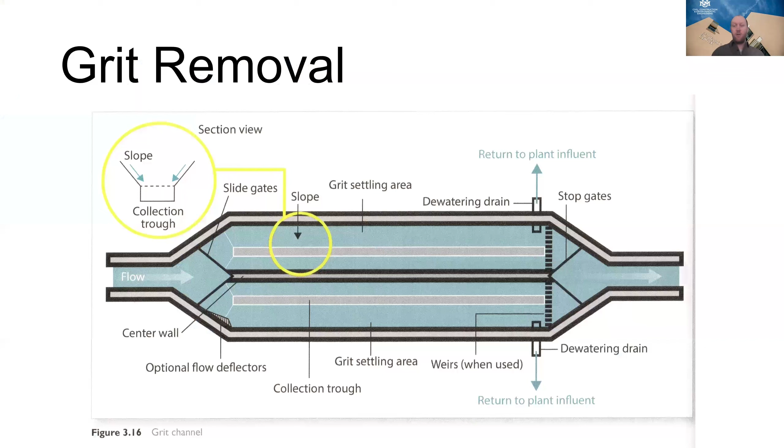Just to talk a little bit about preliminary treatment, really quick, because this also has to do with solids - but different, because today we're going to talk about biological solids. The screening process and grit removal process mostly deal with inorganic stuff, things like bags, rags, gravel, and sand. That's all removed through coarse screenings, fine screenings, grit removal, settling, and mechanical means like the cyclone separator or grit washing device. Those settle out in preliminary treatment and are disposed of in either a landfill or incinerated. These are mostly inorganic materials - rags, plastic bags, all kinds of junk.

I'm sure you've seen it all if you work at a wastewater plant. So that's not what we're talking about today - that's what we covered in a previous session. Today we're going to talk about these biosolids. This is the organic matter, so biosolids - solids that are coming in and are going to turn into our sludge.

So we have a few different streams of solids, of these biosolids, going into our solids handling process. We have our primary sludge from that primary treatment, those clarifiers, coming in here, as well as our waste activated sludge. So we have two different streams of biosolids coming into our solids handling process.

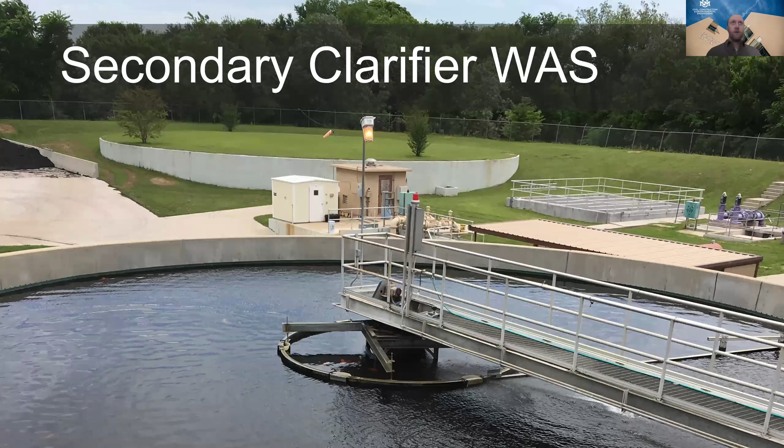Then we also have our secondary clarifier, the waste activated sludge coming from here. This is not going to have as high total suspended solids, so we're not going to get quite as much sludge coming from here. Some of the sludge that comes out of the secondary clarifier, the secondary treatment, is also recycled - that return activated sludge we talked about during our last session. So that's where this sludge is coming from that we're going to talk about today.

Then we have this thickening process, which can happen through a number of means. Then we have our digestion phase, which Matt's going to talk about later. And then we have the dewatering phase. Throughout this process, things are broken down more and the water is removed from these solids. The idea is we want to remove as much water as we can in the thickening and dewatering process, because that means less mass and volume we then need to dispose of.

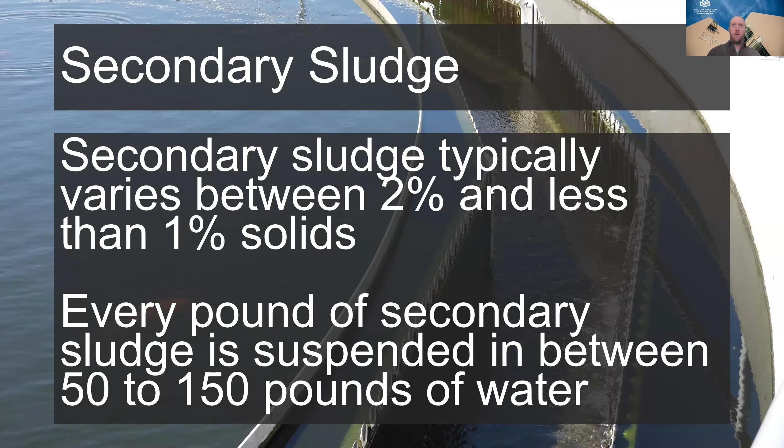If we think about the next step that Matt's going to talk about, if that amount of volume with the decreased thickness was going into our digestion step, it would mean we would need a lot bigger equipment for the digester. So if it's less dense, we need a lot bigger equipment. Through thickening, we can actually improve our digester performance because there's a lot more solids versus water. It means lower construction costs because we don't have as much volume going into that digester, so it's going to be a lot cheaper to have those facilities. And if you happen to have a digester that's heated, you're going to have to use a lot more energy to heat it up than if there's a decreased volume in there.

So for that concept, we're going to go through it, but we're going to look at the numbers associated with that. Here's an example, and we're going to do some math together. Don't feel like you need to do this math on your own. It's just going to go through so we can look at the numbers of how this plays out.

In this example, I'm going to read this off. If a primary clarifier produces 3,000 gallons of sludge per day with a solids concentration of 3%, what is the weight of the solids produced per day?

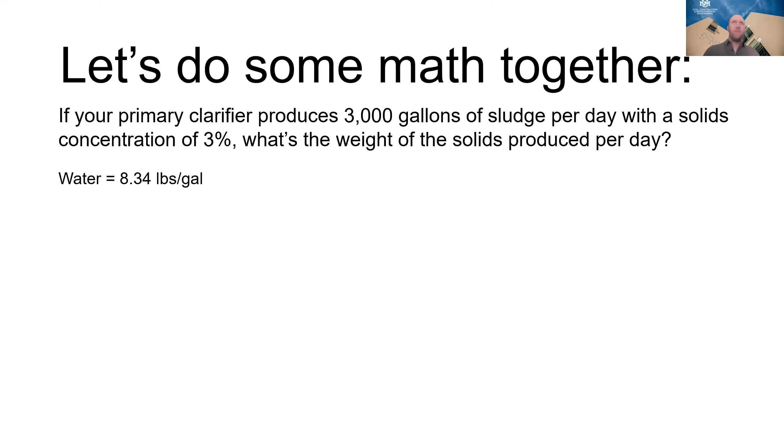If we go through this, we can find a formula for this. I don't know if this is on that formula sheet that you get with the exam or not, but this is the formula you would use to figure out the weight of that dried sludge.

If we use this equation and plug our numbers in, we have 3,000 gallons per day of sludge. And then this 8.34, this is the weight of water. So for every gallon of water, it weighs 8.34 pounds. And then we have our 3% sludge. So 3% of the volume of that is going to be the actual solids.

That 8.34 is the weight of pure water. Of course, sludge is going to be slightly more than that because there is sludge in there, but it's going to be close enough for our calculations. If you wanted to know the actual weight of your sludge, you could take a gallon of it and put it on a scale, or you could figure out the specific gravity of it and have a ratio compared to water. But we're going to use 8.34 for that.

If we cross out our units and calculate that out with a calculator, that 3,000 gallons of sludge per day is going to turn into 750 pounds per day of solid sludge. So that's what we have to get rid of. We can think of it this way: of our raw wastewater coming in per day, there's 750 pounds of solids that we need to remove and dispose of.

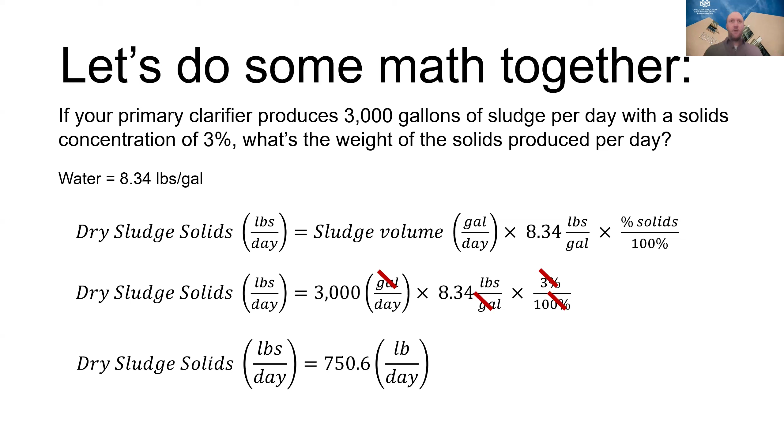Say we are able to increase the percentage concentration of our solids, or of that sludge, to 5%. Say we do that through a gravity thickener or something like that. So as opposed to 3% solids, now we're up to 5%. Let's do that same equation and figure out the amount of difference that would make in terms of volume.

We're going to use the same equation as in the last slide, but do it a little backwards because we're going to start with our 750 pounds of solids per day that we need to remove, and put that on the left. Then we have the rest of the same equation, so we're going to figure out what is our sludge volume. If we rearrange our equation and calculate that out with our calculator, that's going to come out to 1,800 gallons per day of sludge.

So that's the volume we're going to have. We started at the beginning, remember, with 3,000 gallons per day of sludge at 3%. And now, if we can just increase that concentration up to 5%, that almost cuts our volume in half, from 3,000 gallons per day to 1,800 gallons per day. So a pretty big difference there. Even just going 2% thicker makes a big difference.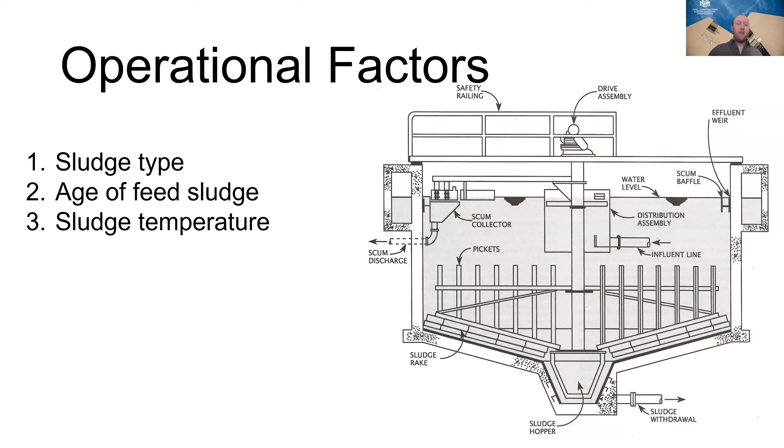The sludge temperature makes a big difference in all kinds of water and wastewater treatment methods, because temperature is really just a measurement of how quickly molecules are moving around. The quicker they move, the higher the temperature, and the more efficiently they're doing their metabolic and chemical functions. So the higher the temperature, the more activity you'll have with those microorganisms. Also, water is denser at lower temperatures, so that makes an impact too on how well this functions.

Another factor is the sludge blanket depth—the thickness of that blanket at the bottom of the clarifier. You can have this thicker or thinner depending on your operations. Where I worked, we varied it all the time just to see what works best, and that depends on your individual system.

And lastly, the other factors are the solids and hydraulic detention time—the amount of time the solids and water are in that chamber—and the solids and hydraulic loading, the amount of solids and water going into the equipment. All of these are going to have an impact on how this works.

Okay, so if we think about our sludge characteristics, this works best with primary sludge because it's thicker, so it compacts better. Fresh sludge also works better than older sludge. It compacts better. That's our point.

Septic sludge, or older sludge, can have decreased oxygen or even nitrogen, and that can cause gasification of metabolic processes that create gases like CO2, methane, and hydrogen sulfide. You don't want gases released into this process because gases are more buoyant, so it decreases the settleability and compaction of this blanket.

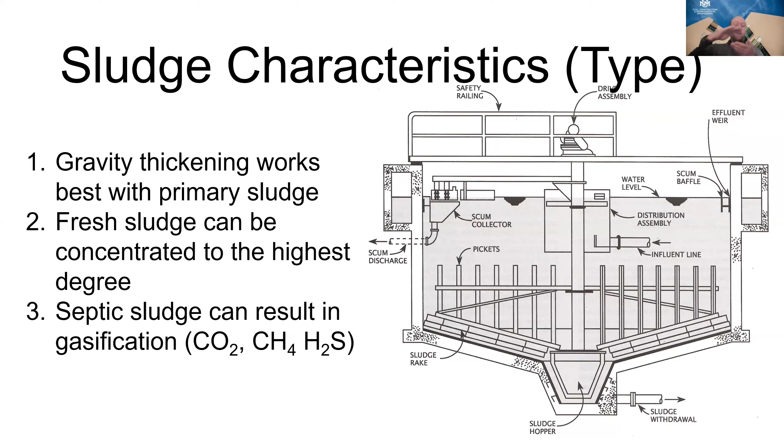Now just to compare that with secondary sludge. As I mentioned, secondary sludge is less dense and doesn't settle quite as much. A lot of that sludge is really composed of microorganisms, and even in those microorganisms there's all kinds of water trapped in those cells. So even those biosolids are mostly water in secondary sludge, and they don't like to compact very well. Those solids are also typically finer in secondary sludge than primary solids.

Now just thinking about age: if sludge is held too long, decreased oxygen may occur. You have oxygen depletion, which can cause denitrification, and again can cause gases to form, which impacts the settleability and compaction. There's also the type of organism - filamentous organisms are associated with older sludge, and they can also decrease the settleability and compaction.

Lastly, temperature. We've kind of already talked about this, but with increased temperature, biological activity increases, so that gasification and sludge rising with those gases can also increase. So sometimes these work better in the winter than the summer.

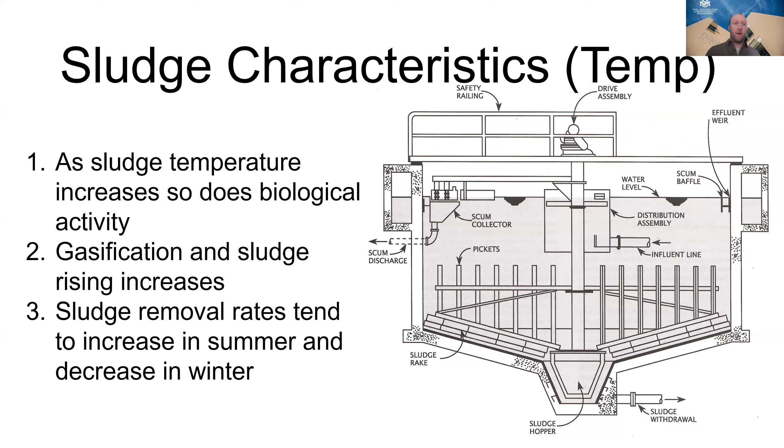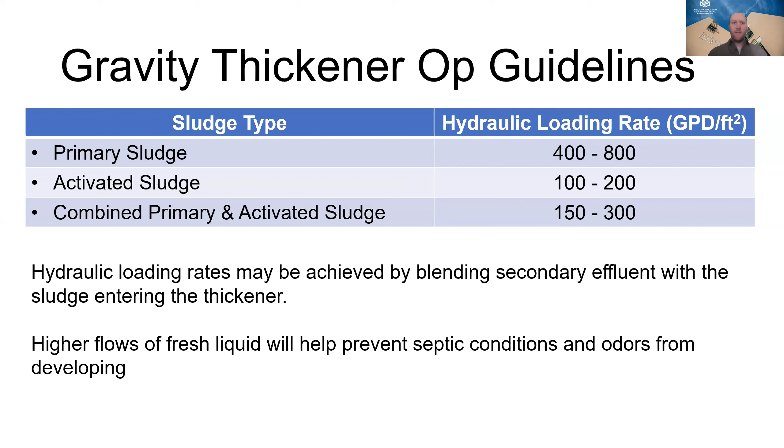This is just some other parameters, looking at hydraulic loading rate - the amount of volume per day per square foot for different sludges. Sometimes you can adjust that by blending your secondary effluent with your sludge. And if you have higher flows with more liquid, it can kind of prevent some of those septic conditions and odors from developing if you have too old or too compacted sludge. So there's a lot of things you can mess around with to make them work better.

So we're going to do a poll really quick. In this poll, we're going to troubleshoot an issue with the gravity thickener. Say you have a gravity thickener that's experiencing gasification - that gas is making the sludge rise, decreasing how well the gravity thickener is working. Which of these following options might help correct the operation of this? Matt, if you could throw up that poll.

Thank you. There are two right answers here, so see if you can choose one if you want, or you can choose both if you know what they are. Okay, I'll give you a minute. All right, we'll give you another few seconds, get your answer in. And it's all right if you don't have an answer - we'll go over this.

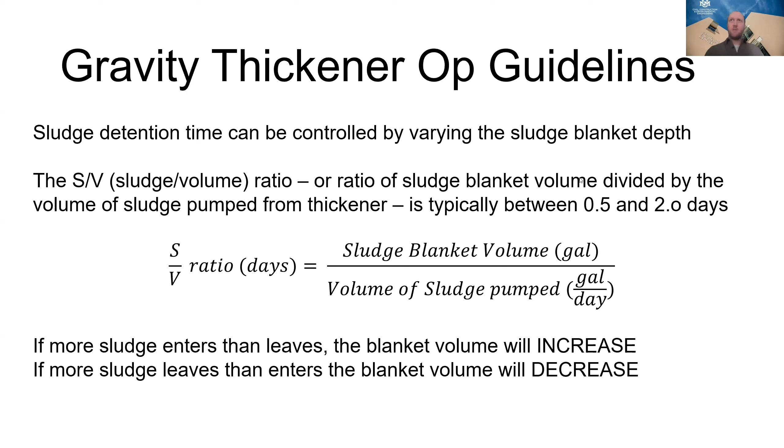If you have more sludge entering than is leaving, you're going to increase that blanket volume. And if you have less sludge than is leaving, then you're going to decrease that blanket volume. So these are just some things you can calculate to improve your operations if need be. And this is just some of the parameters of that.

Okay, another thing you can calculate is this efficiency, this removal percentage. After your gravity thickener, you are going to have two streams again. Our sludge is coming in, and then we're going to have that thickened sludge coming out the bottom, but we're also going to have that liquid, the water, what's called the supernatant, flowing over these weirs. So you can figure out what the removal efficiency is of that sludge coming in versus what that water coming out is, using this same percent removal equation.

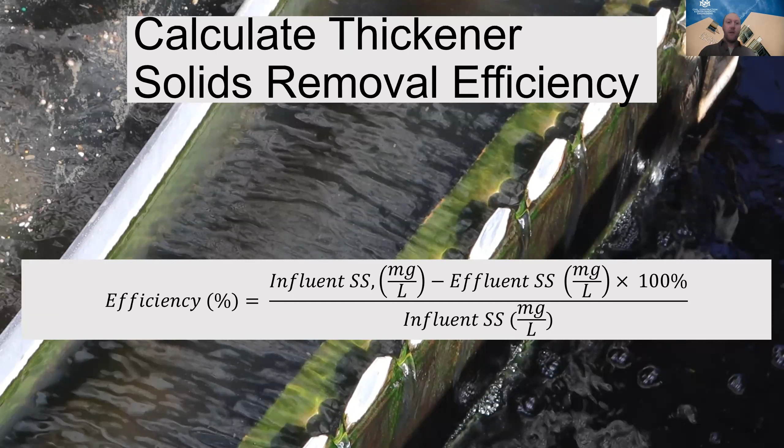This is something that you can use for all sorts of different removal calculations, like if you want to remove nitrogen, or you want to remove the total suspended solids or something. You can use the same equation to measure how much you're removing throughout whatever your process is.

So in this example, we want to figure out what our efficiency is, our removal for our gravity thickener that has flow in at 30 gallons per minute at 3% concentration, and then flow out at 0.15% concentration. So we can figure out what our removal percentage is. I think this is normally a poll, but I'm just going to give you the answer because I'm running a little low on time here.

To do this, what we do is plug in our influent concentration, so our 3%, or we can enter this as 30,000 milligrams per liter, and then we subtract our effluent, that 0.15% concentration, or we convert that to milligrams per liter or parts per million, and then we divide that by our influent, that 3%.

If we plug that into our calculator with those numbers I just described, we come out with 95%. So what that means is, for our sludge coming into this gravity thickener, it's removing 95% of that total suspended solids. That's pretty good. This is just an example showing you can calculate this out by having it in milligrams per liter, also known as parts per million, or you can actually just keep it as your percentage and calculate it that way. You can do either way.

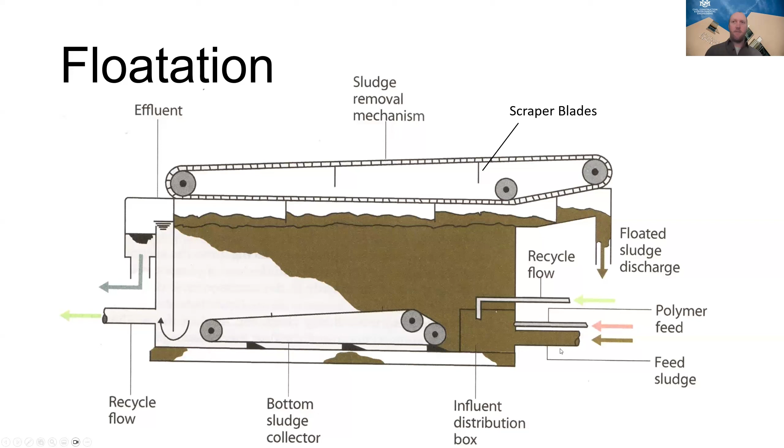Or some of the things are still going to settle out. So these often have sludge removal at the bottom as well. So that's how these work.

This works the same concept as when you open a can of pop or soda and pour it into a glass, you'll see all these bubbles coming up. This is because the liquid in the can was under pressure, and once that pressure was released, all these little bubbles—in this case carbon dioxide—come out of solution and bubble up, creating that fizzy action. It's really the same process we're talking about here.

It actually is also the same process of pressurization. A lot of these work by pressurizing that liquid and then releasing it under atmospheric conditions. Then all these bubbles come out and come to the top and do that mechanical action of floating up these particles.

There's dispersed air flotation, with just little aerators actually releasing air at the bottom of something, kind of like your lagoons may have aerators in them, so it's bubbles coming up. They can also just use biological activity to create gases. I don't know how common that is—I don't think super common.

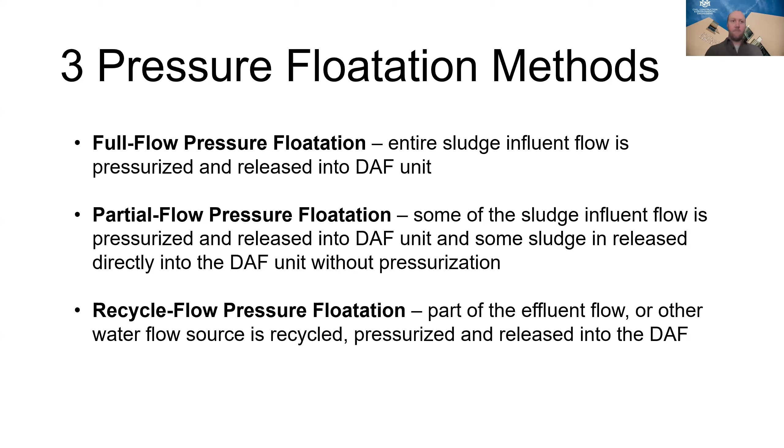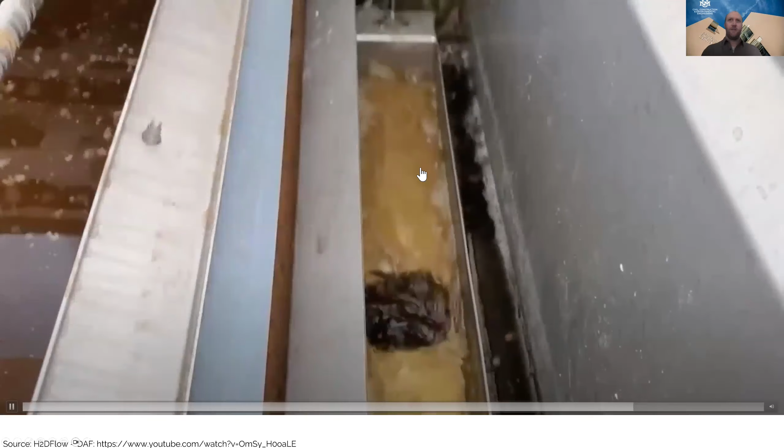Here's a video of this. You can kind of see the rake pushing that top blanket into a trough. And over here on the other side is the water that's flowing out. You can see that water is pretty clean.

Here's some operational guidelines for the capacity and what these can accomplish, depending on whether you have them with a polymer or without a polymer. These are pretty efficient and work very well.

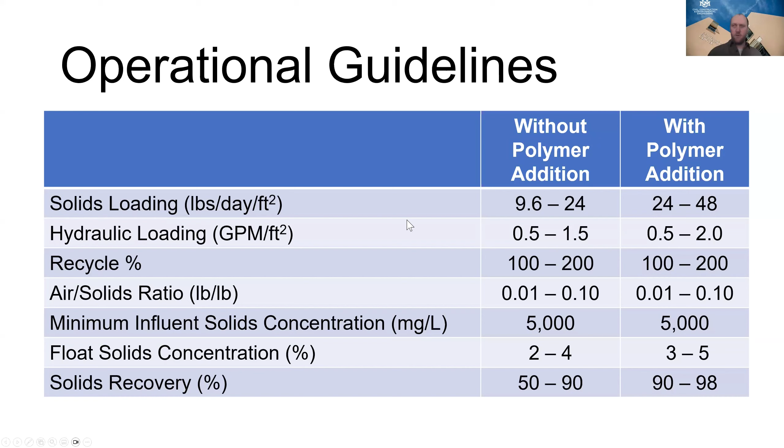The next piece of equipment I'm going to talk about briefly is centrifuges. This is a concept you're probably all familiar with, like what your washing machine does after it washes your clothes, spinning all the water out to the side. It's pretty much the same concept in wastewater centrifuges.

This is called a solid bowl centrifuge, and this is a video that I'm going to play really quick. I will note too that some of these companies have really great videos of their equipment, but this by no means means that we're endorsing that company or anything. They just have nice videos.

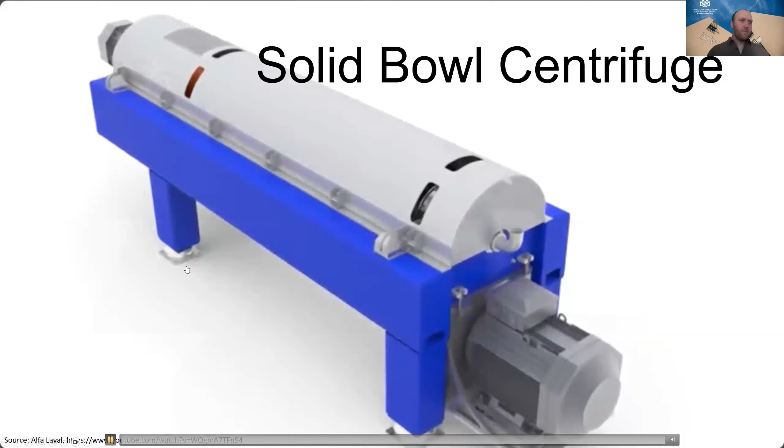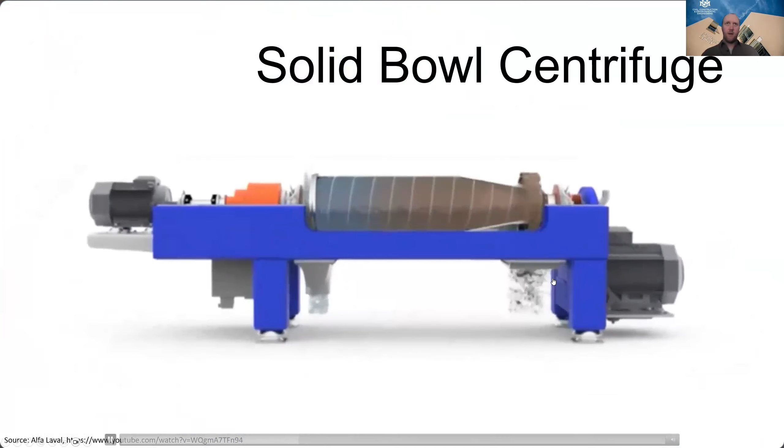You can see in this that there's a big tube with a corkscrew going through, and the wastewater is pumped into the center of this and goes into that corkscrew, which pushes the solids one direction while the water goes the other direction, and that centrifugal action spins the solids out at the end. So solids come out on one end, water comes out on the other end. These typically run continuously, and are generally used in larger plants.

You can kind of see the action going on there, and there's a perforated corkscrew, and yeah, there's that sludge coming out one end.

Okay, and here are just some parameters for centrifuges, so you can adjust them to do all kinds of things. These centrifuges are kind of cool because they can both work for sludge thickening and also the dewatering stage, depending on how they're used in different styles.

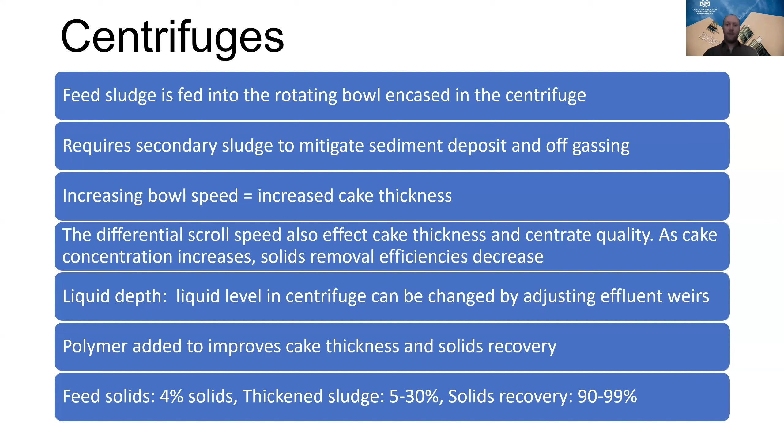Okay, another piece of equipment. Sorry, I skipped over that last slide, but I think it's more important to go through all these different pieces of equipment.

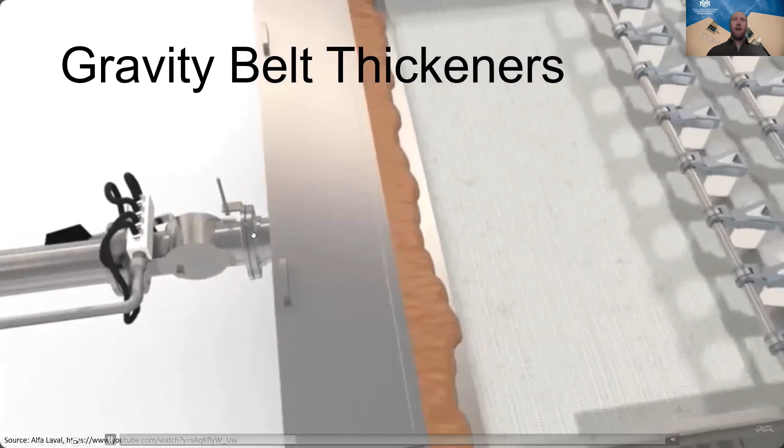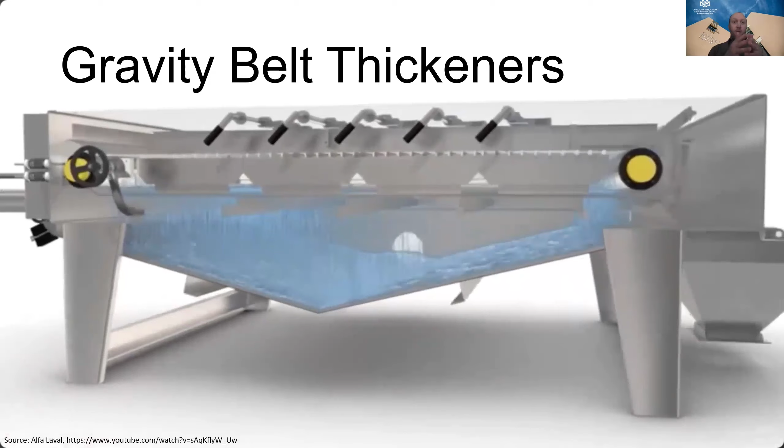So this is what's called a gravity belt thickener. It's pretty similar to a belt press, which you may have heard of and are pretty common, but this is for thickening as opposed to dewatering. It's not going to remove quite as much water, but it's more of a thickening process, maybe before the digestion phase. The sewage comes in on the left, a polymer is added, and then the sludge is poured onto a conveyor belt that has holes in it, is perforated. It goes over all these different plows that break apart the solids, allowing the water to separate out from the solids, and it falls through that perforated mesh conveyor belt into a trough below. The solids accumulate at the end and then go over into a trough.

So a lot of machines do a similar kind of process.

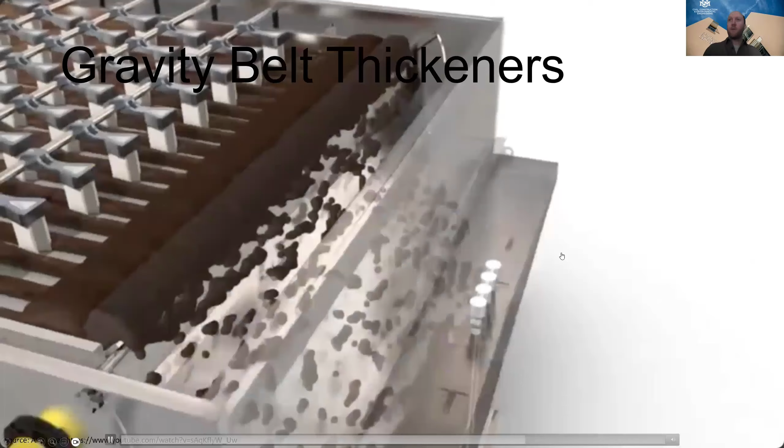Okay, we also have this drum thickener. I kind of like watching these animations, they're kind of satisfying, I think. Let's skip through this one.

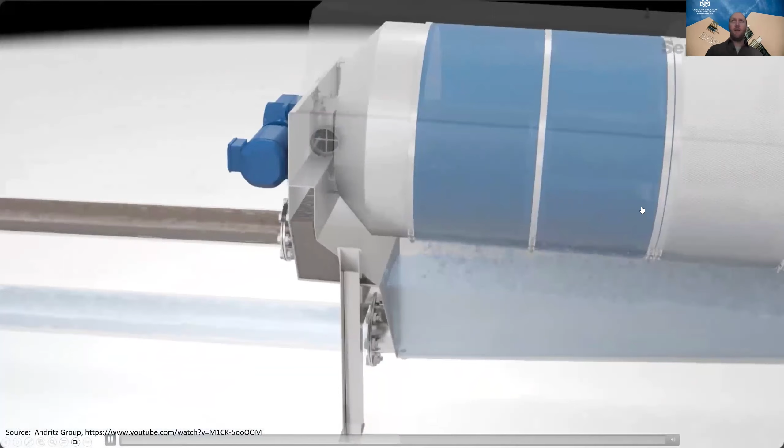So in this one, we have our sewage coming in, polymer is added, and it's mixed up, and that then goes into this thickening unit. This is a big drum, and it kind of reminds me of these big drum-like pre-treatment grit separators. Basically, it's a big perforated drum or mesh drum. The water can go through it, and then the sludge accumulates inside the drum and comes out the other side.

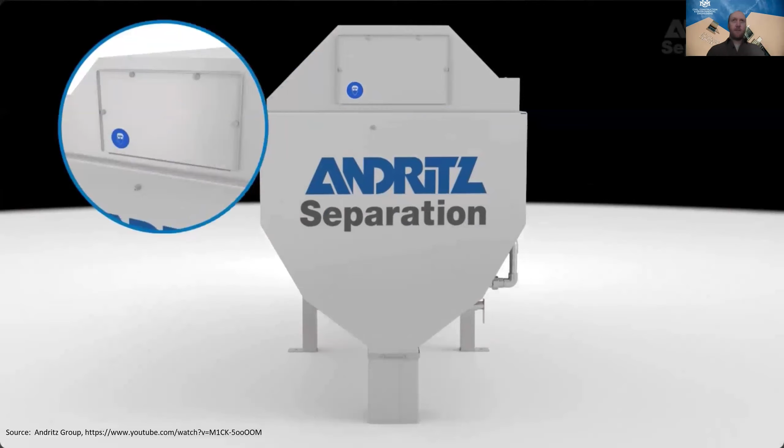Okay, so there's all kinds of different things that can be used for sludge thickening. We went through a lot of these. I'm going to skip through this, but you can take a look at this later if you want to know more of what each of these can be good for and the parameters for them.

But this really is where it goes into the digestion phase, and Matt's going to talk about this in just a minute. I'm going to talk about the dewatering phase first before Matt goes into that, just because this process is very similar to what we were just talking about, kind of an extension of that thickening process. It's just removing more water from those solids.

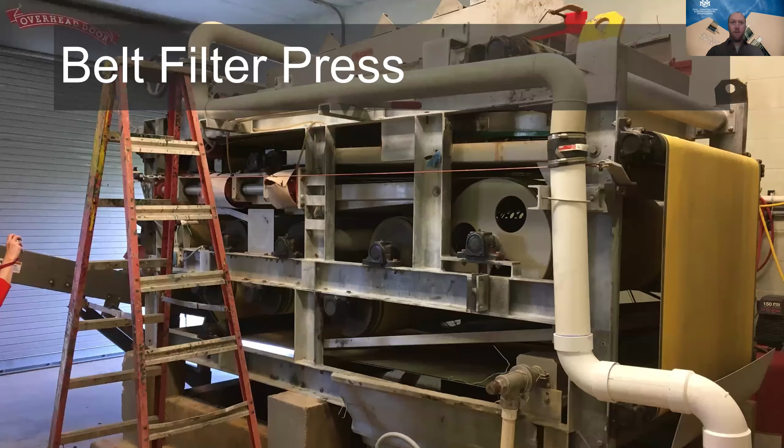Basically what this does: it has a mesh belt that the water can go through. You can see at the top those plows, like in that video we saw, it has that same process at the beginning, but then it squeezes that sludge in between two mesh belts and squeezes it through rollers, squeezing out more water. Then those solids accumulate at the end, get removed through a conveyor belt, and go into a dump truck to be disposed of.

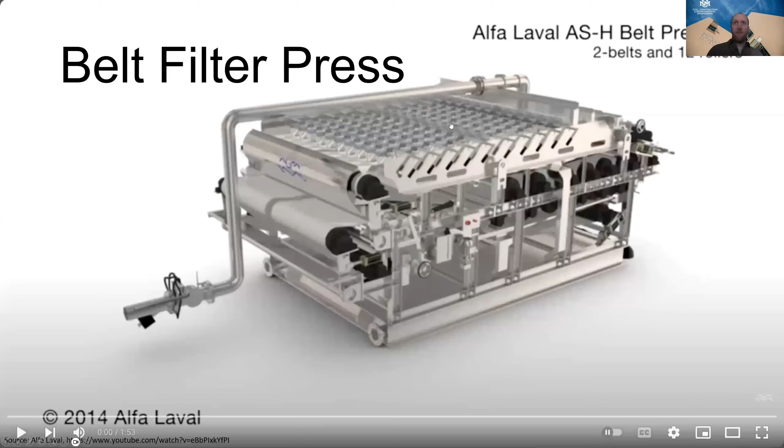So here's a nice video. Again, we have polymer mixing in with this, and it flows up here just like it did in the other belt thickener. Then it goes through these plows again and it allows water to separate from the solids and it falls through.

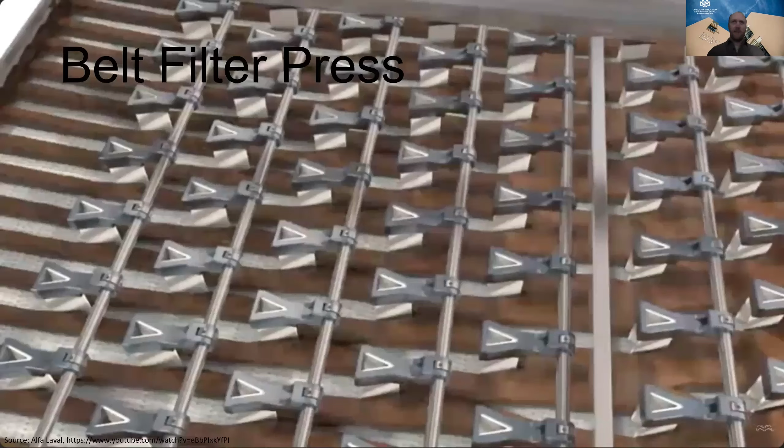But in addition to that other video we saw, it goes into a secondary process, like I was mentioning. It goes into this area where it gets squeezed in between these two belts, and then it goes through all these rollers that essentially squeeze the two belts together with the sludge in between, squeezing water from that sludge.

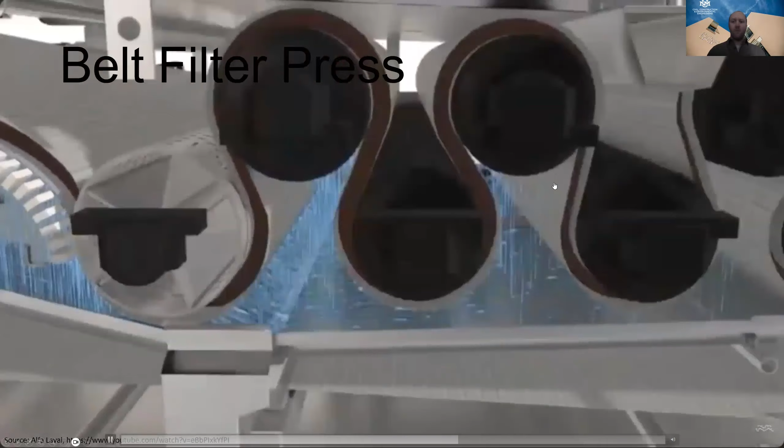These dewatering processes remove a lot more water than just the thickening process we talked about earlier. So as opposed to just a thicker sludge that would go into a digester, this makes it into a solid. This is what's called cake. Don't eat it though.

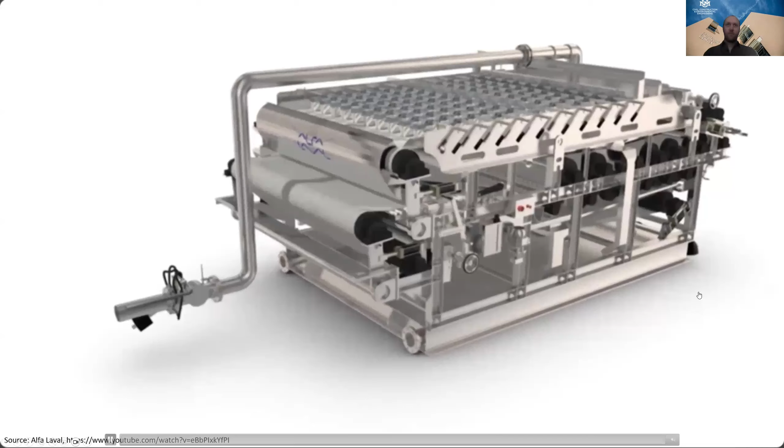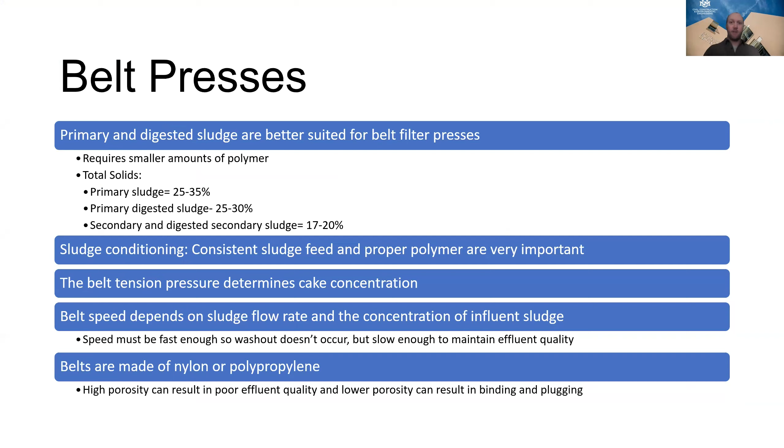Here's just some parameters about that belt press that you can review later if you'd like, plus some more details on how you can troubleshoot it to get different results if need be. But I'm going to move on to talk about our next equipment.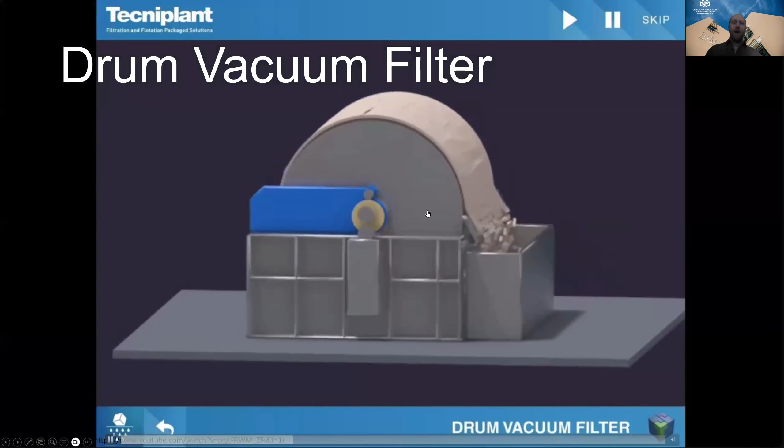We have these drum vacuum filters, which is pretty much the same concept, except this time you have a drum with the solids going on the outside, and then there's a vacuum on the inside that sucks water through a mesh screen into the inside of the drum.

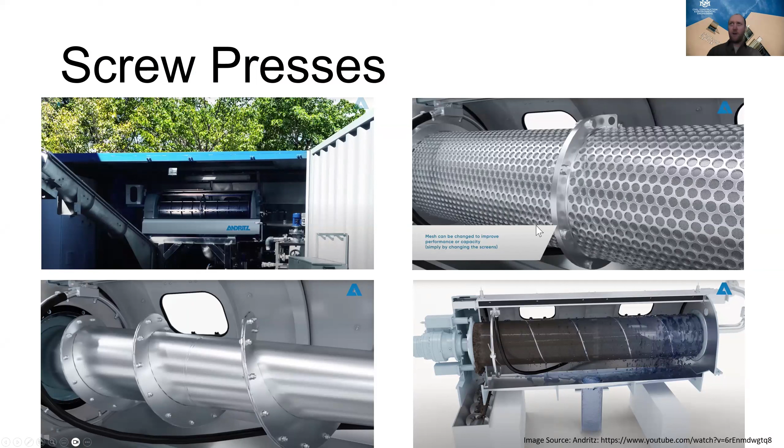And then a screw press - pretty much the same concept. It's just separating water from that sludge through pressure and through a mesh screen.

And then lastly, and this transitions into what Matt's going to talk about with the drying beds, are these different very low tech kind of dewatering methods.

I know a plant in Montana using these with a very brand new plant, because even the designs for the plant didn't adequately address the sludge dewatering. So they're having to buy these, fill them up, dewater them, and then a company comes and hauls these away.

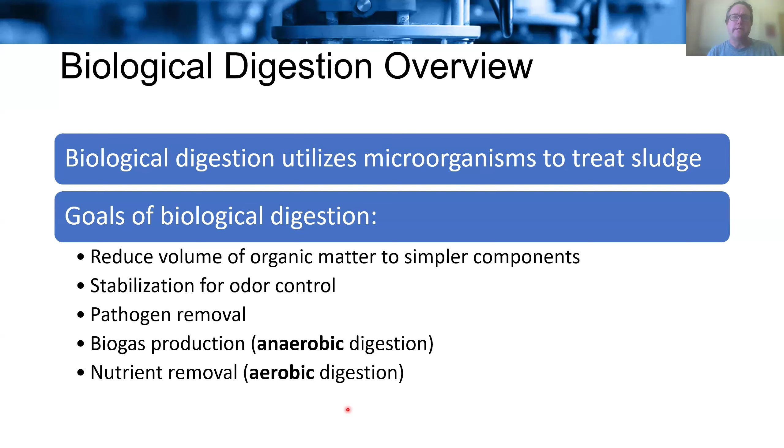Achieving digestion goals results in a number of benefits. Digested sludge often has improved dewatering characteristics, allowing for more efficient and cost-effective dewatering processes. This results in further reduction of sludge volume and facilitates subsequent handling and disposal. It means mechanical dewatering, which Tucker covered earlier, is more easily accomplished.

Successful digestion positively affects the end product, often referred to as biosolids, which are more stable, less hazardous, and less odorous than untreated sludge. Biosolids can be used in agriculture as a soil conditioner, in land reclamation projects, or incinerated with reduced environmental impact.

That's not the only positive environmental impact that proper digestion results in. By reducing sludge volume and improving its characteristics, digestion processes help minimize the overall environmental impact of sludge disposal. This can include reduced greenhouse gas emissions, lower landfill usage, and decreased risk of groundwater contamination.

Before we discuss digestion in more detail, we need to touch on what exactly is being digested. Sewage sludge used in digestion can originate from various sources within the treatment process, as Tucker has told us. Each process produces different types of sludge with its own characteristics.

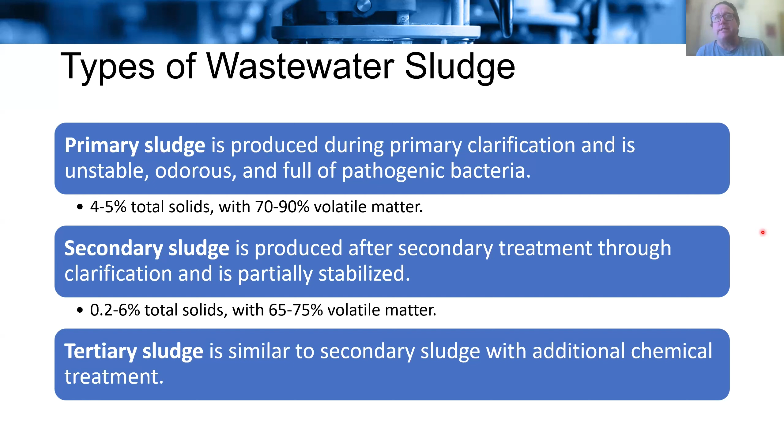Now that we know the basics of digestion and sludge and what it is supposed to accomplish—reducing the volume by breaking the sludge down into simpler components like carbon dioxide and methane—let's look at the details of our first type of digestion: anaerobic digestion. This is where we will cover the steps and chemistry of the process of anaerobic digestion, as well as the components of the digesters and their operation and troubleshooting.

Anaerobic digestion is a biological process, like any type of digestion, that takes place in the absence of oxygen. It's widely used in wastewater treatment for the stabilization of sewage sludge.

Anaerobic digestion relies on two groups of bacteria living together. First, the saprophytic bacteria, which are the acid formers. The other type are the methanogens. Methanogens are not as abundant and require very specific conditions to reproduce, needing a pH range of 6.6 to 7.6. Anaerobic digestion occurs in multiple steps that we will look at in detail.

The important byproducts of the anaerobic digestion process are methane, carbon dioxide, and the water that we're trying to take out of the sludge. Let's look at the specific steps of the process.

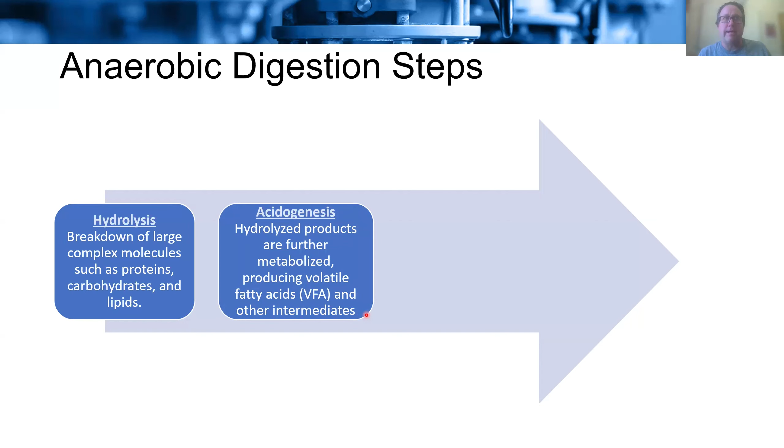Next we have acidogenesis, which has a few different mechanisms, but the overall goal is to further metabolize the intermediate components from hydrolysis into volatile fatty acids with acid-forming bacteria, also known as fermentative bacteria. They further metabolize the products of hydrolysis, producing organic acids, alcohols, and other fatty acids.

In the next step, the intermediate products from hydrolysis and acidogenesis are converted into acetate, another volatile acid produced by the acetogenic bacteria. This conversion is a crucial step in anaerobic digestion, as acetate serves as a key substrate for the next group of microorganisms, the methanogenic archaea.

The methanogenic archaea are responsible for the final step in anaerobic digestion, where they convert acetate, hydrogen, and carbon dioxide produced in the previous stages into methane and carbon dioxide, the biogases. This unique group of microorganisms belongs to the archaea domain and is primarily responsible for producing that biogas. They have been shown to be genetically different from bacteria, but are also single-celled microorganisms.

Temperature plays a big role in anaerobic digestion, and we have three distinct temperature ranges: psychrophilic, mesophilic, and thermophilic. All of these take advantage of different groups of bacteria to aid in the anaerobic digestion process.

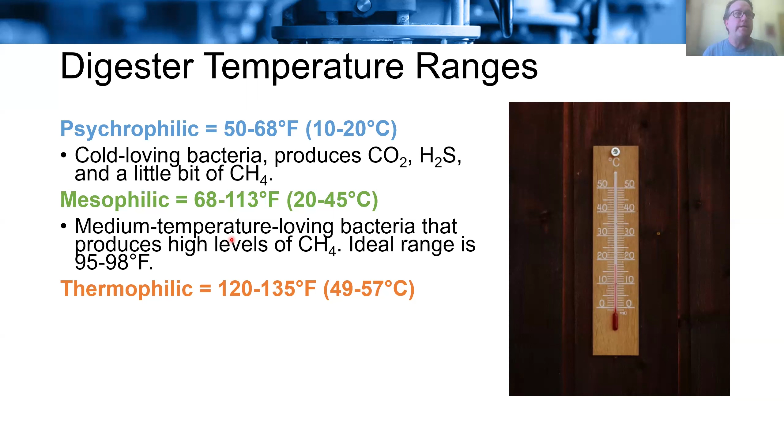Thermophilic anaerobic digestion takes place at higher temperatures, typically between 120 and 135 degrees Fahrenheit, accomplished by heat-loving bacteria, the thermophiles. This temperature range can accelerate the digestion process and increase biogas production rates, and is particularly effective at destroying pathogens and can be used to treat more challenging organic materials. However, it requires more energy to maintain that higher temperature, and some microorganisms may be less competitive under these conditions, resulting in poor liquid and solid separation.

Standard conditions for anaerobic digesters can vary depending on the specific design, purpose, and the type of material being treated. Since mesophilic temperatures are most commonly used, we'll refer to the preferred parameters for mesophilic conditions from this point forward. There are several key operational parameters commonly monitored and controlled in anaerobic digestion systems to ensure efficient and effective performance, including temperature, detention time, pH, and volatile acid to alkalinity ratio.

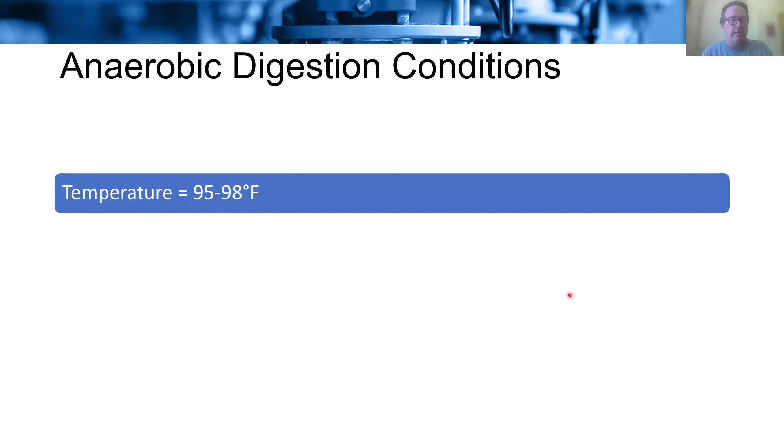As previously stated, the ideal temperature range for mesophilic conditions is 95 to 98 degrees Fahrenheit. The detention time for anaerobic digesters should typically be between 25 and 30 days.

The recommended pH for anaerobic digesters, as previously mentioned, is the 6.6 to 7.6 range, but the optimal range of 6.8 to 7.2 will ensure ideal conditions for the methanogens to do their job.

Finally, the volatile acid to alkalinity ratio should be 1 to 10. This is because alkalinity, often measured as total alkalinity or bicarbonate alkalinity, helps buffer the pH and maintain a stable environment for microorganisms. Adequate alkalinity levels, typically 1,500 milligrams per liter as calcium carbonate, are crucial for maintaining digester stability. We'll talk a little bit more about that in a few slides.

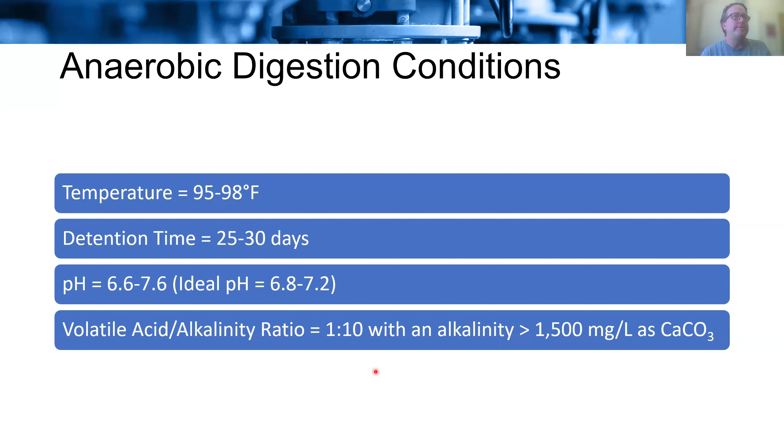Tanks are cylindrical and about 20 feet deep, with sloped floors so that sand, grit, and heavy sludge can be withdrawn, as well as to transfer seed sludge to a primary digester, pump it to drying beds or a dewatering facility, or to recirculate bottom sludge and break up scum blankets.

Next, sludge lines. They're essential in managing sludge volumes in the digester because we have to move stuff around a lot. Sludge feed lines feed into the top of primary digesters, opposite where the supernatant or overflow line would be. They can also be injected into a sludge recirculation line upstream of the heat exchanger.

Discharge lines are located at the bottom of sloped digester tanks, and these draw-off lines should be a minimum of 6 inches in diameter to allow for adequate discharge. They're equipped with plug valves, which do not get fouled with debris or rags like a gate or butterfly valve would.

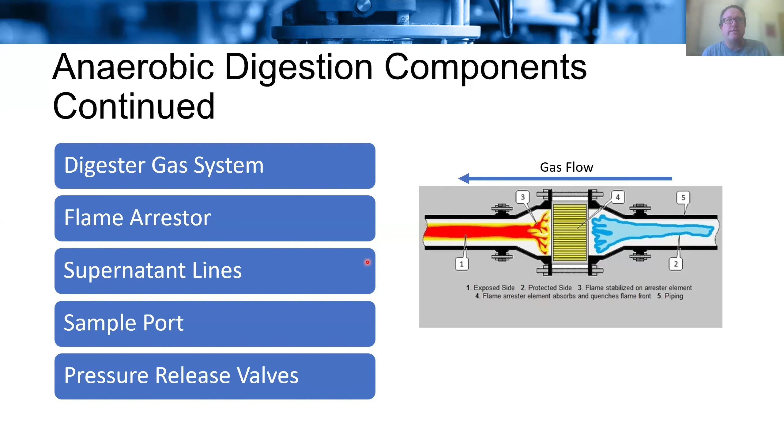The specific design and configuration of anaerobic digesters can vary based on the size and type of your wastewater treatment facility, the treatment goals, and available resources. Proper operation, maintenance, and monitoring of these components to ensure effective anaerobic digestion and safe operation of the digester is super important.

Now that we know about the different parts of the digester, let's talk about operating anaerobic digesters. In the mesophilic range, digestion occurs in two stages, primary and secondary digestion. In the primary stage, sludge is heated using heat exchangers and then mechanically mixed. Up to 90% of gas production happens here. These digesters use fixed covers, as already stated.

During the secondary stage, the digester is used for storage as well as solid liquid separation. This is where floating covers are used to accommodate both fluctuations in sludge volume being treated in the system, as well as gases. It is the secondary digester where supernate is sometimes returned to the primaries or headworks, as we mentioned earlier. This water is usually high in ammonia and BOD, so the process needs to be managed. The secondary digester also serves as a source to reseed a primary digester if it becomes upset or sour. Finally, secondary digesters are sometimes mechanically mixed, but it is not an essential part of it, like it is with primary digesters.

As with many wastewater treatment processes, it's important that operators have a strong understanding of your pipe alignments. Digester lines are complex to allow for transfer as needed, and it's important to avoid any confusion with this process.

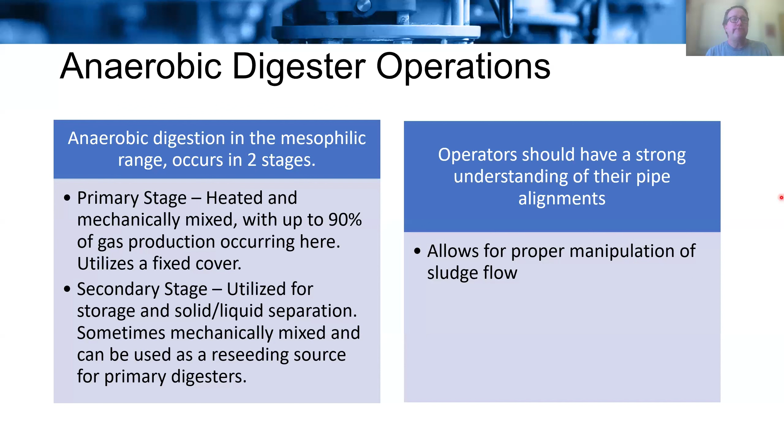Successful anaerobic digestion operations revolve around maintaining the balance of acid formation using the saprophytic bacteria and methane fermentation through methanogenesis. To do this, it's important to maintain the ideal temperature and not change that temperature more than 1 degree Fahrenheit per day. Those organisms need time to adjust to the conditions, and large fluctuations in temperature can impact that process.

Proper mixing in the digesters is also important to maintain a balanced system, to ensure even heat distribution and keep the microorganisms in contact with the food that they need to do their jobs.

Proper sludge feeding is important, as well as withdrawal rates. You need to maintain them in accordance with design specifications, because we don't want to overfeed sludge, because that overfeeding can increase the volatile acid content of the digesters. That's going to increase that volatile acid to alkalinity ratio, and you'll recall this ratio should be 1 part volatile acids to 10 parts alkalinity under ideal conditions.

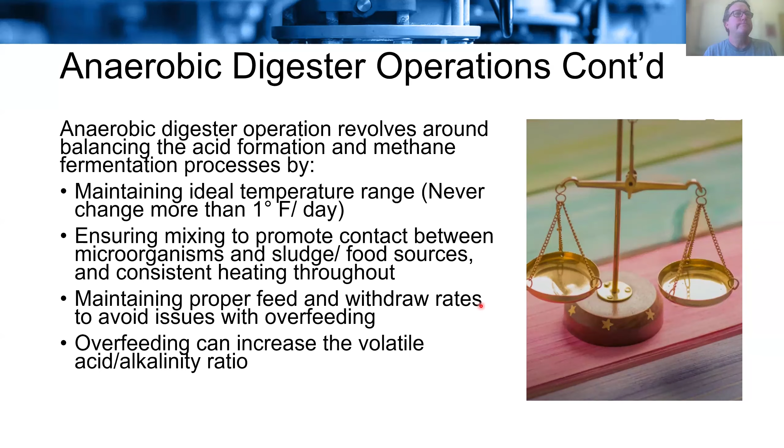Sludge feeding is going to be much more detailed than new operators tend to realize. It should be a well-mixed combination of both raw sludge from primary clarification and partially digested secondary sludge from biological and wasting processes, such as the dissolved air flotation and the rotary drum thickeners. That's really due to the differences in those two types of sludge.

With raw sludge, or primary clarifier sludge, it typically contains 4 to 5% total solids, of which 70 to 90% is volatile matter, which is digested rapidly. Wasted or secondary sludge after biological treatment ranges to 0.2 to 4% total solids without a polymer. If you use a polymer, then it's going to be 3 to 6% total solids and contains 65 to 75% volatile matter, which leads to slower digestion than the raw sludge.

When we do digestion, we really want to have a mix of both of these sludge types to make sure the digestion process is adequate and we get the product that we're expecting.

With sludge feeding, we want to make sure to do it several times a day. One, to avoid lowering temperatures, but also to avoid overfeeding. This helps keep primaries from holding too much sludge for too long, and really ensures the thickest sludge possible is being fed into the digester.

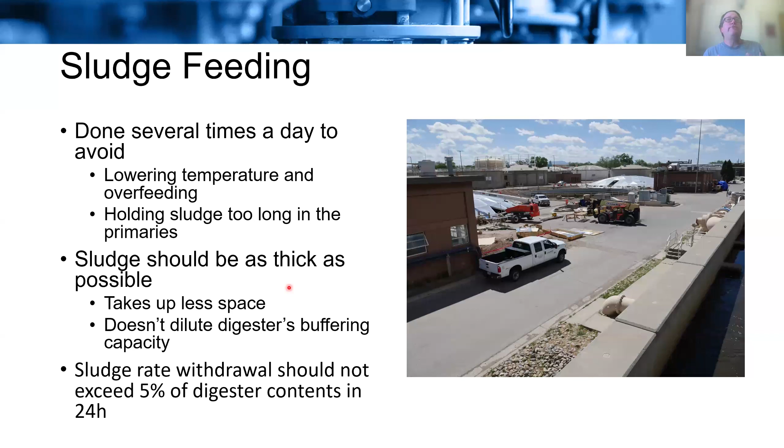Sludge rate withdrawal should not exceed 5% of digester contents in a 24-hour period, again to avoid upsetting those microorganisms. So you need to monitor the process to make sure you're meeting all of those parameters, and to operate these digesters correctly it's important to look at these key parameters.

As we've talked about multiple times, it's important to monitor the temperature of the digester to keep it in the ideal temperature range and to ensure that you aren't changing that temperature by more than 1 degree Fahrenheit per day. You usually measure temperatures in the sludge recirculation line and at the heat exchangers. This is because it's best to monitor temperature as the sludge is leaving the digester and the temperature of it after heating, as it's being recirculated back into the digester. It's also useful to monitor the temperature of the water being used for heating so you can understand how that may impact changes to sludge temperature.

Sludge samples should be analyzed in the lab multiple times a week to establish that volatile acid and alkalinity concentrations, to ensure the 1:10 ratio is not exceeded.

You should also monitor biogas content. The methane to carbon dioxide ratio for a good digester gas should be about 65 to 70% methane and 30 to 35% carbon dioxide. If CO2 levels exceed 42%, the digester is not operating well, and at a 45% CO2 level, the gas is not going to combust or burn. Hydrogen sulfide gas levels should be less than 5%.

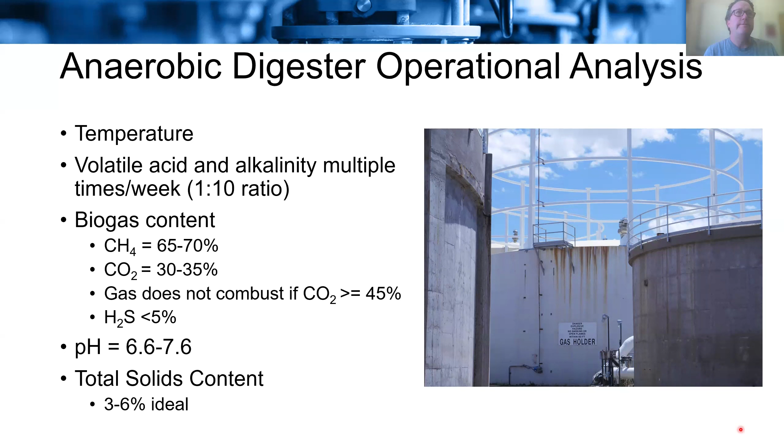Finally, to go along with operations and analysis, we'll talk a little bit about digester issues and troubleshooting. The first problem we'll discuss is digester souring. This is indicated by a volatile acid to alkalinity ratio that's greater than 0.1 or 1 to 10, and a pH range that has dropped to 7.0 to 7.2.

It's frequently caused by excessive raw sludge feeding, causing the acid formation to exceed the methane fermentation, or the sludge withdrawal rate is too high. The excessive acid will inhibit the activity of those methane producers. Remedies are to pause feeding and recirculate secondary digester sludge to the primary digester to increase alkalinity and reseed good organisms.

A digester may also become stuck. This condition is indicated by a volatile acid to alkalinity ratio greater than 0.5 and a pH below 7.0 and dropping. It is caused by not correcting a souring digester, so if you don't take care of it, your digester is going to become stuck. Remedies are again to pause the feeding, to stop the production of more acid, and to add alkalinity by adding lime, calcium hydroxide, or soda ash, sodium carbonate. Both will neutralize the organic acids and get your volatile acid to alkalinity ratio back where you want it.

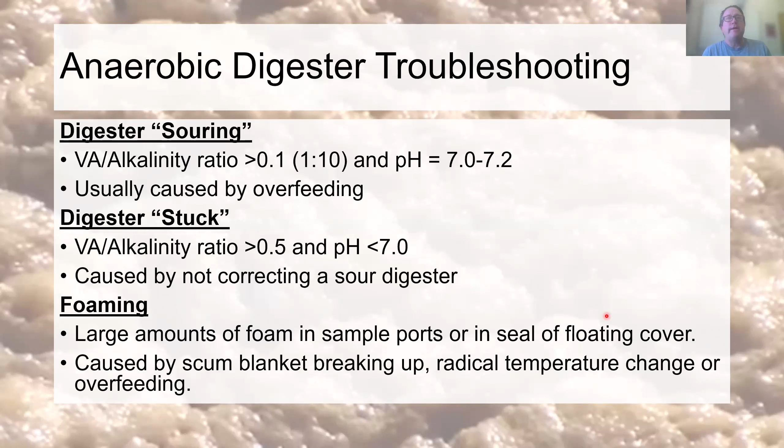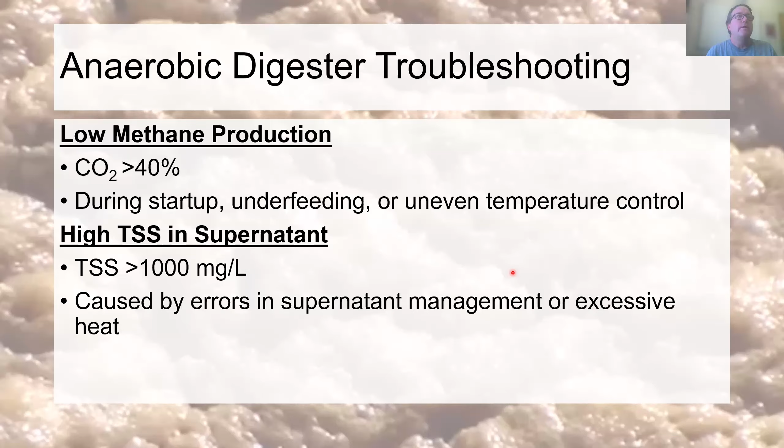One of the important byproducts of anaerobic digestion is producing biogas, so you have to have a collection system to collect that biogas. This system is composed of a gas dome on top, pressure and vacuum relief valves, flame arresters, thermal valves, sediment traps, drip traps, gas meters, a manometer, pressure regulators, and a waste gas burner.

When we are producing biogas, you're getting 8 to 12 cubic feet produced for every pound of volatile matter that you're adding to that anaerobic digestion, and you're going to get 12 to 18 cubic feet produced for every pound of volatile matter that you're destroying.

Because biogas has a heat value of 500 to 600 British thermal units, or BTUs, per cubic foot, it can be used for heating the digesters. You can also drive generators for electricity at the plant, and you can also use it for heating buildings.

Well, that was a broad overview of anaerobic digestion. If you have any questions about what was covered, put them in the chat and we'll make sure they get answered. The other type of digestion is aerobic digestion, which we're going to talk about right now.

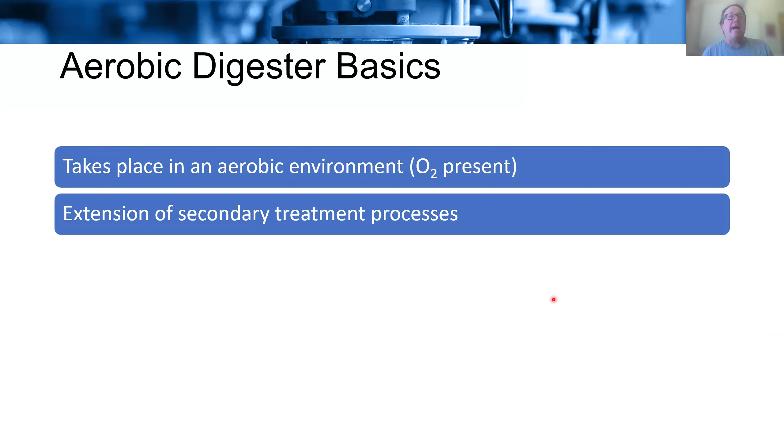Aerobic digesters can be thought of as an extension of secondary treatment processes. They are typically seen in small to medium-sized plants that utilize extended aeration, activated sludge, and sequencing batch reactors, or SBRs. Solids are held in a tank, provided air and mixing with no artificial heating.

Because there is no food source, the organisms eat each other, they devour each other. This is known as endogenous respiration, where organisms metabolize their own cellular matter because there is no external food source. This process results in a breakdown of the sludge with the release of carbon dioxide and water vapor. Pathogens are reduced because of predation from a wide variety of microorganisms.

Aerobic digestion is not as efficient as anaerobic digestion, so we only see a volatile solids reduction of about 20 to 40%, but overall detention times can be somewhat shorter at 20 to 30 days.

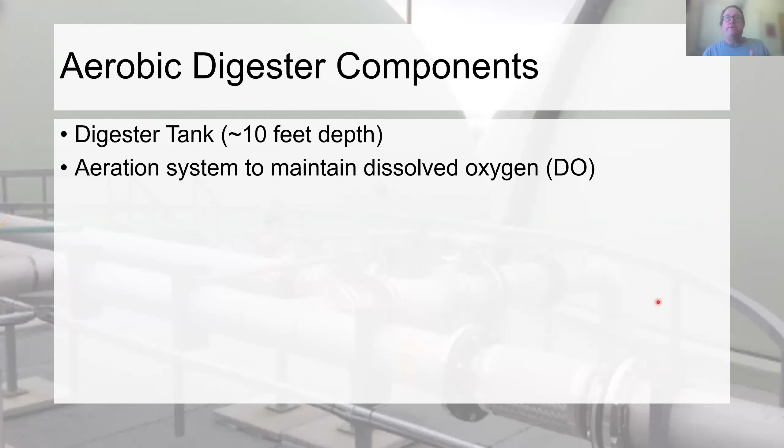Aerobic digesters are very similar in construction to anaerobic systems, but often at a smaller scale. Like anaerobic systems, they have digester tanks to hold sludge, but these are shallower at about 10 feet deep. They also have aeration systems to maintain the system's dissolved oxygen. These systems can use floating surface aerators, fixed bridge aerators, or blowers using coarse bubble diffusers.

Just like anaerobic digesters, sludge inlet lines come into the top of the digester above the tank's high water level, with outlet lines located at the bottom or sunken in a sump on the digester floor and are used for emptying and for maintenance. Lines should be a minimum of 3 inches in diameter.

Supernatant tubes are widely used to remove decanted liquid off the top of the sludge and return it to the headworks. To remove supernatant, it has to be shut off to allow sludge to settle to the bottom. It's important to keep in mind that supernatant can be a source of filamentous bacteria.

As we learned previously, filamentous bacteria can serve as a structure for other bacteria to attach to and form flocs as part of the flocculation and settling process. However, an excessive number of filamentous bacteria may cause problems with sludge settling, bulking, and foaming, and have an impact on wastewater treatment efficiency.

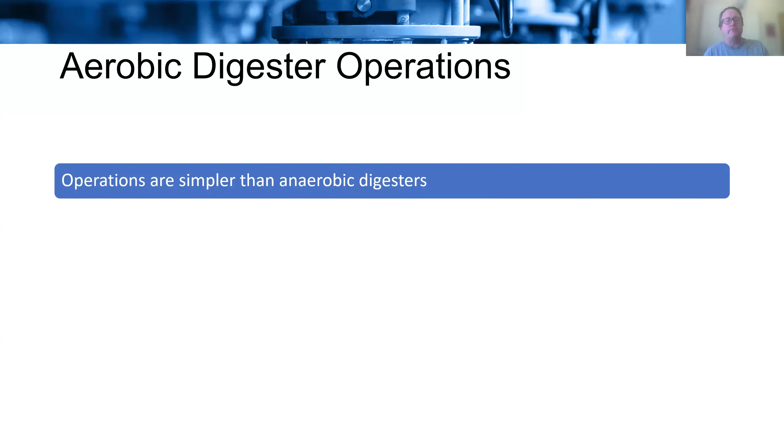Aerobic digester operations are simpler than anaerobic digesters because fewer issues can arise with fewer moving parts and fewer process control monitoring requirements. Feed rates aren't as critical, and really they're based on the need to remove solids from the secondary treatment process, so you feed it when you need to remove solids from that process.

It's the same for sludge removal rates, which are determined by their level in the digester and the availability of sludge dewatering and drying units. So when you need to remove sludge and you have available equipment, you can go ahead and remove it from the aerobic digester. As with secondary treatment processes, it's important to maintain a dissolved oxygen of 1 milligram per liter, or the digesting sludge will have odor issues. Some would describe the smell like a rotten melon or worse.

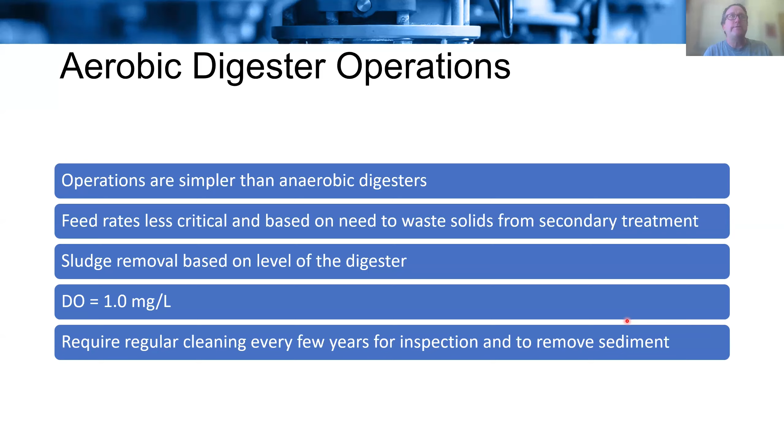Digesters need to be taken offline and cleaned at least every 3 years to remove sediment buildup and to inspect equipment inside the digester. Just like anaerobic digestion, there are some important parameters that should be monitored in the aerobic process.

First, the pH of aerobic digesters should always be greater than or equal to 7.0. If the pH drops below 7, there's going to be a problem in the secondary treatment process, such as nitrification, which causes the wasted sludge from the secondary process to become acidic. If this occurs, adding a source of alkalinity to the digester, like lime, will increase the pH.

Total solids content of the sludge should also be monitored. For the feed sludge, you should monitor the digester sludge and the withdrawn sludge. Sludge in aerobic digesters should have a total solids range of 1.5 to 4%. Volatile solids reduction should be monitored in the 20 to 40% range mentioned earlier. Reductions of these solids indicates the effectiveness of the aerobic digestion process.

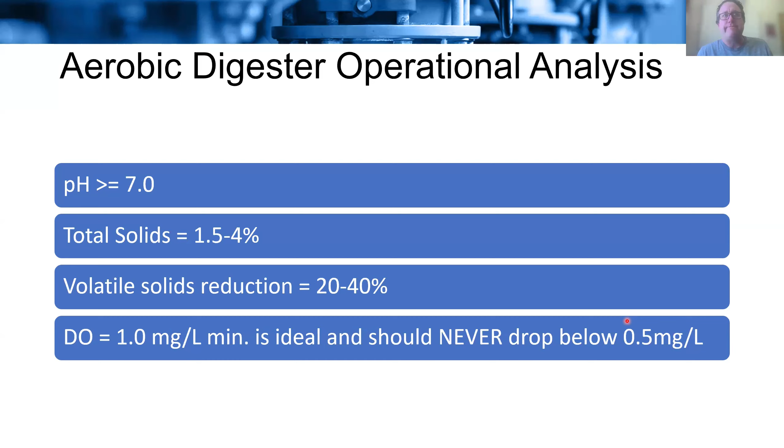Over time, the volatile solids reduction is going to decrease due to buildup of sediment in the digester. If you see this, it indicates the detention time is decreasing and the digester needs to be taken offline and cleaned. Finally, there is dissolved oxygen, which we mentioned earlier, which should be maintained at a concentration of 1 milligram per liter and should never be allowed to drop below 0.5 milligram per liter to avoid odor issues.

Now that we have stabilized and reduced our solids through primary and secondary treatment processes and digestion, we are going to look at how to get rid of those solids through land application.

The precursor of land application are drying beds, which are used as an alternative to mechanical drying processes that Tucker already talked about. There are 3 types of drying beds: sand, asphalt or concrete, and vacuum filter beds.

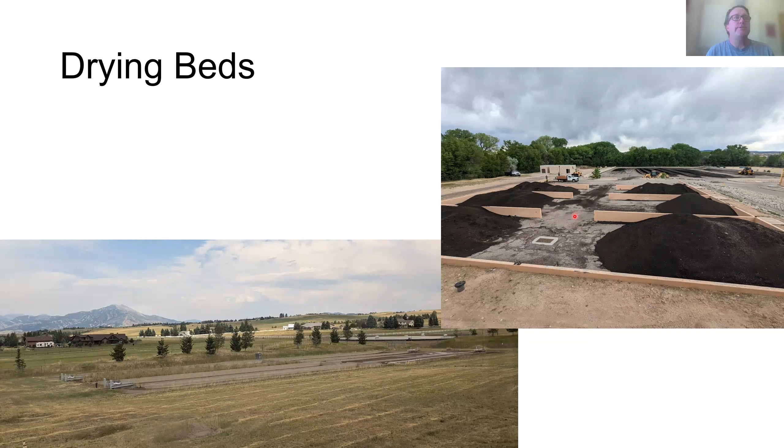A sand drying bed includes a shallow lined concrete or earthen basin, and it has a perforated pipe that's installed under a 12 to 18-inch layer of gravel with 8 to 12 inches of sand on top. Decant tubes are located on the corners of the drying bed to drain pooled water from the sludge. Drying is accomplished through water evaporating up from the sludge while also percolating down through the sand layer where it's collected and removed by the perforated pipe under-drain system.

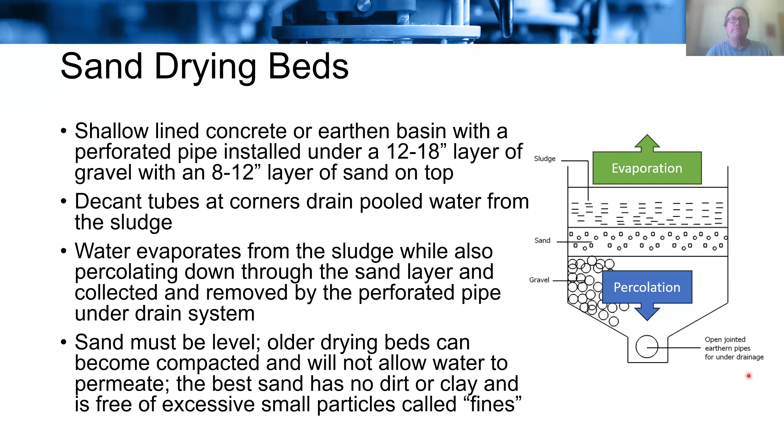Condition of the sand layer is important. It has to be level. Older drying beds can become compacted and they're not going to allow water to permeate. If this happens, you have to remove the top 2 to 3 inches of sand and replace it with fresh sand. Some beds use expensive pre-washed sand and others use arroyo sand. The best sand has no dirt or clay, and it's free of excessive small particles called fines.

Sand drying bed operation: as mentioned previously, frozen sand drying beds can only be cleared when thawed. Sludge should be poured onto the drying bed to a depth not exceeding 12 inches, or drying time will increase substantially. Also, new sludge should not be poured on partially dry sludge. This is known as capping, and it causes the lower layer of sludge to get sealed off, turning into something called green sludge, which is really odorous and won't dry.

If you use polymer, it's going to cut that drying time in half. When the sludge has dried and cracked all the way through to the sand, it is removed by shovel, or if a skid loader is used, care has to be taken not to crush the under-drain system. Managing this process effectively can produce greater than 95% total solids.

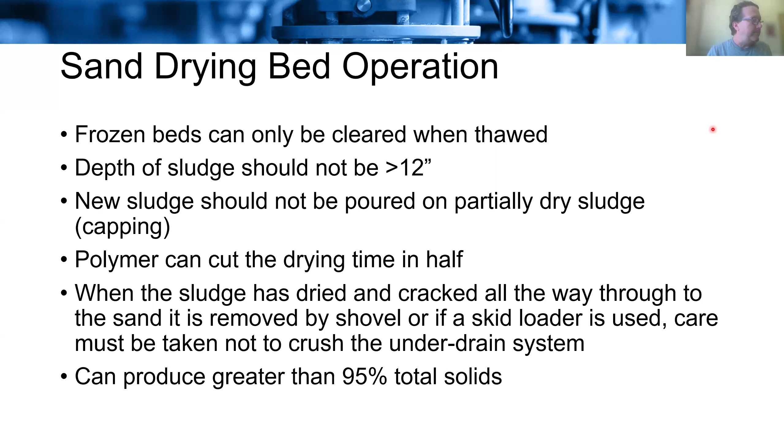Next, we are going to look at asphalt or concrete drying beds. These drying beds function just like sand drying beds, but instead of sand, asphalt or concrete is used as the surface on which the sludge is applied. The hard surface allows the sludge to be mixed with a tractor, backhoe, or specially designed equipment, which really speeds up that sludge drying time.

Because of this, sludge can be poured to a deeper depth of 18 to 30 inches. Due to that sludge depth, decant tubes are really important for removal of surface water in this case, because evaporation alone would take too long. Decant tubes are...

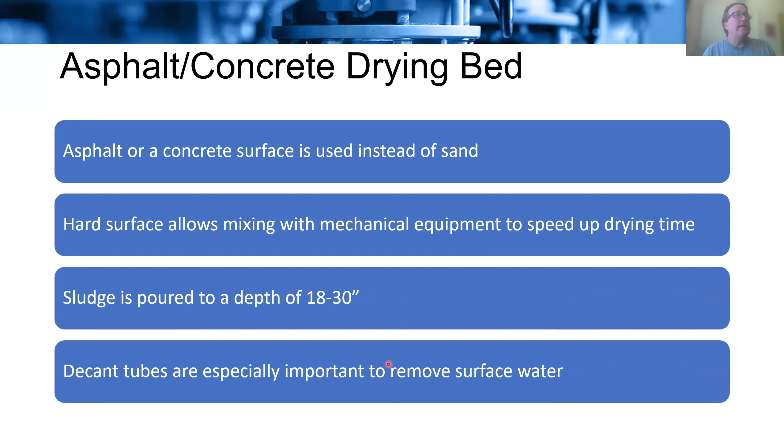Finally, we're going to look at vacuum filter beds. These beds consist of a shallow concrete basin with an underdrain system covered with porous pumice bricks or stainless steel or plastic perforated panels. Sludge is conditioned with polymer before being put into the bed. A vacuum pump is used to create a vacuum underneath the panels, which rapidly draws water from the sludge. This process can produce sludge with 15 to 30% total solids in a matter of hours or days, so it can rapidly dewater that sludge.

Also, the filter bed can be cleaned by a skid loader or a small backhoe, really decreasing the man hours needed to maintain them.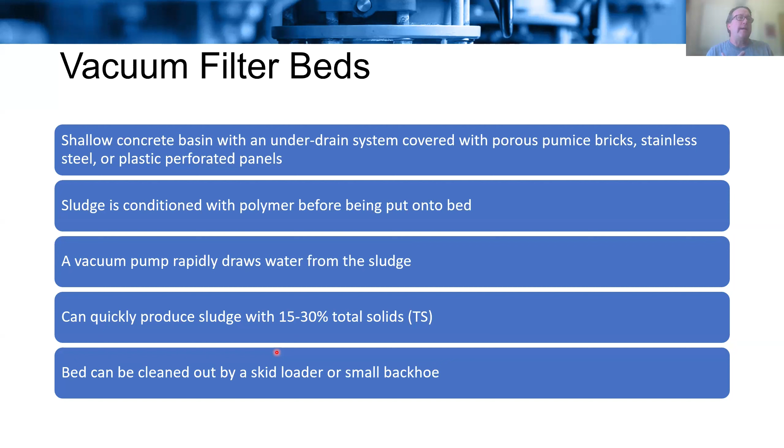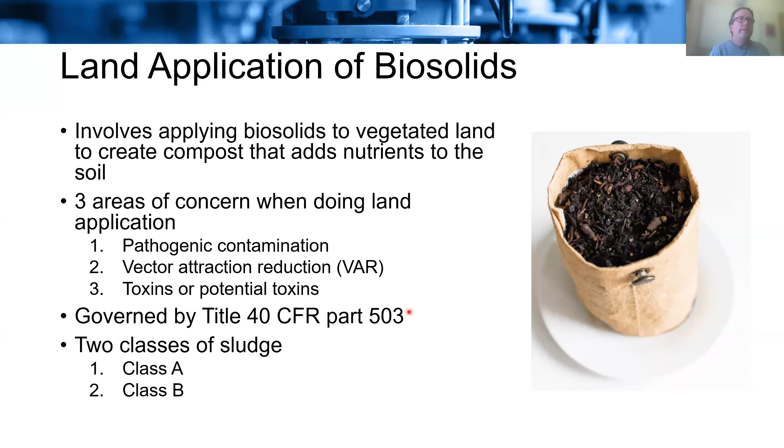Class A has strict composting requirements, and composting is a thermal aerobic biological practice, similar to aerobic digestion, that breaks down compounds into nutrients. Sludge is placed in a pile called a windrow, along with wood chips or other mulched green waste.

Microorganisms digest the sludge and green waste, and those windrow piles have to be mechanically aerated or turned to provide oxygen to keep aerobic organisms active. Microorganism activity creates heat and temperatures greater than 131 degrees Fahrenheit, which must be maintained for 15 days with 5 complete pile turnings done within that time.

To apply biosolids to land, a special compost facility operator license is required.

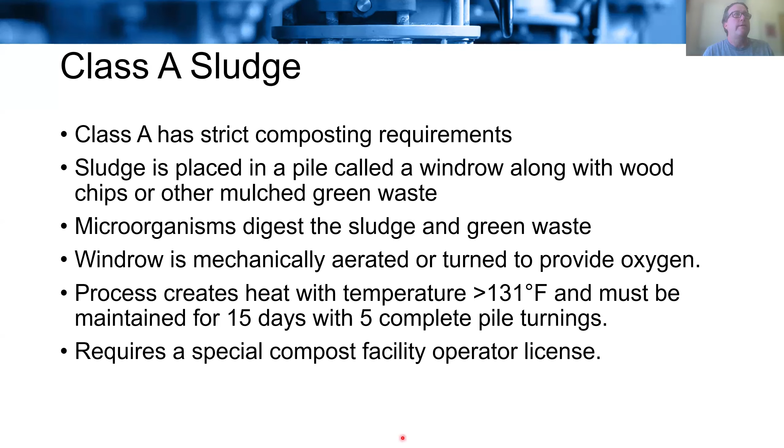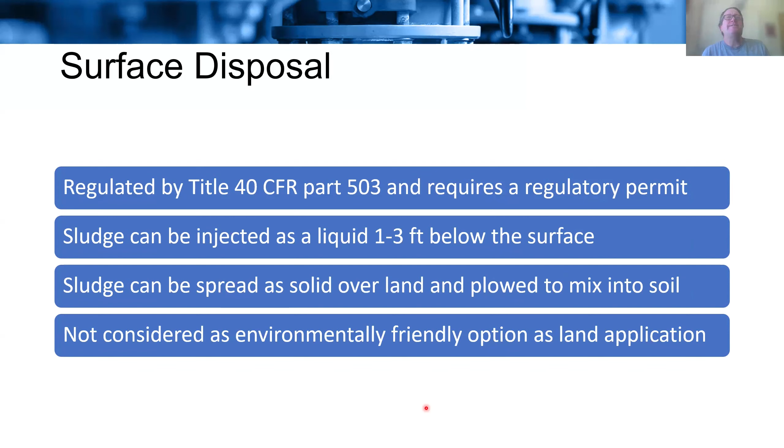Sludge can also be injected as a liquid 1 to 3 feet below the surface, or it can be spread as a solid over land and plowed to mix into the soil. Surface disposal of sludge in this manner is not considered as environmentally friendly an option as land application.

Finally, landfilling is the least desirable option for sludge disposal. It takes up valuable landfill space and should only be practiced if the sludge is of poor quality or due to economic limitations. Landfilling of sludge requires a sludge disposal plan approved by the appropriate regulatory agency. Sludge haulers have to be licensed with a special waste permit to transport that sludge.